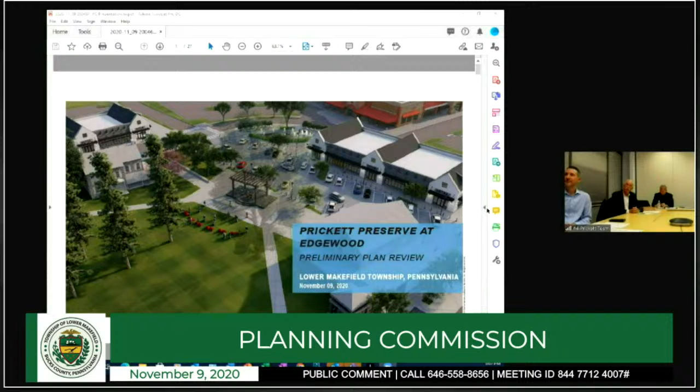So that's our group. We have a short presentation we'd like to begin with. We received, I think, 10 reviews, and we recognize the plan is going to have to be revised and brought back. We've sent you a response letter that I'm sure you haven't had the opportunity to review yet, but it will provide background to where we're going. So I think we'll start with the presentation, and then we'll go to any questions the commission might have. Fair enough. Thank you.

Sure, can everybody hear me? Yes. Okay, and can everybody see my screen? Yeah, perfect. Okay, so good evening. My name is Seth Shapiro. I'm a principal and the director of planning and urban design for Barton Partners. We are an architecture, land planning, and landscape firm located in Norristown, and we've been working on this project for well over a year now. With me today from my office is one of my partners, Matt Koenig, an architect and architectural principal.

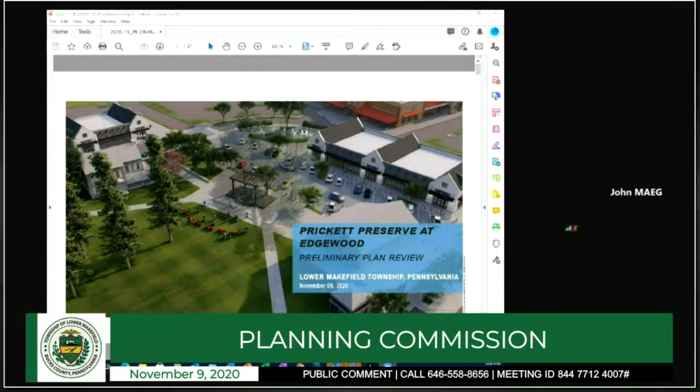Hey guys, could you take the presentation full screen, please? Is that something I need to do? Yeah. Full screen, right?

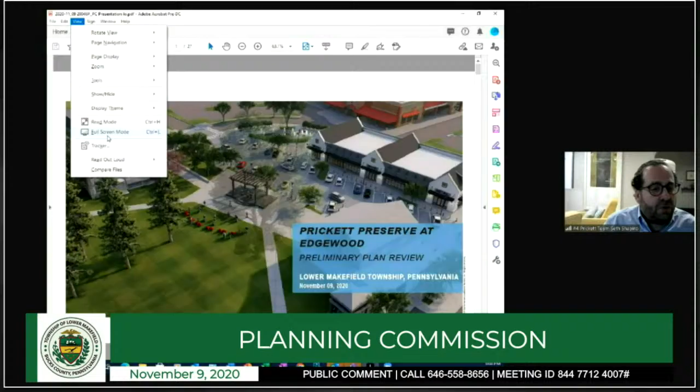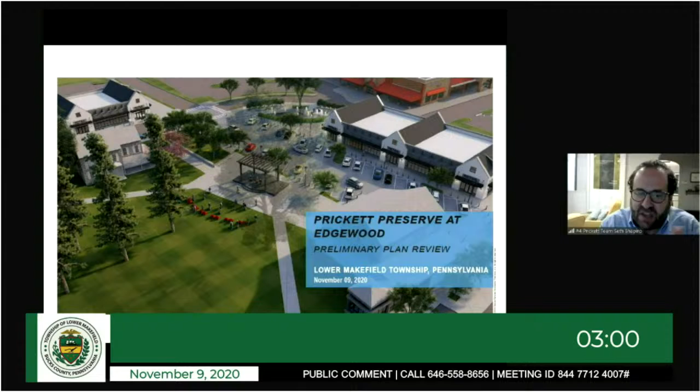With me tonight is one of my partners, Matt Koenig, one of the architecture principals, and Lauren Moran, one of our landscape architects who's been working on this project. You'll hear a bit from Lauren and Matt as we talk about an option for the landscape, which is so important for this project.

This is going to be a bit of a rehash of a prior presentation, but there will be a bunch of updates about what has changed in the plan since last fall as we've worked through the zoning process. Obviously, this is a very significant site.

It's been with the Prickett family for close to 70 years, a big antique dealer, and there are two really significant buildings on this site, which when we first looked at it, we thought, hey, this is something we need to maintain, and how can we do that?

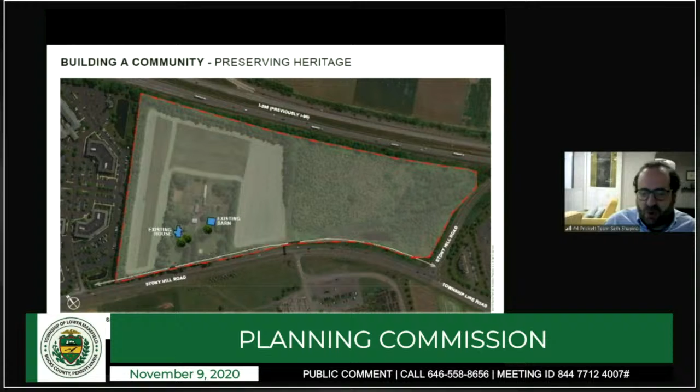As I mentioned, when we look at this site, we don't look at it as a blank site. We immediately recognize that the existing farmhouse and barn were things that needed to be maintained. Knowing the programmatic requirements we had to work with, that presented quite the challenge, but also, we think, an incredible opportunity to create a civic space.

So with that, we organized our retail uses. The big red box is the Wegmans - everybody knows about the Wegmans. Back last fall, when we were working on this, we organized other retail uses around a central open space, and this is relatively unique. Usually you'd see a big retail anchor, a strip of retail shops, and a big parking lot - a strip center, if you will. That's not what this is.

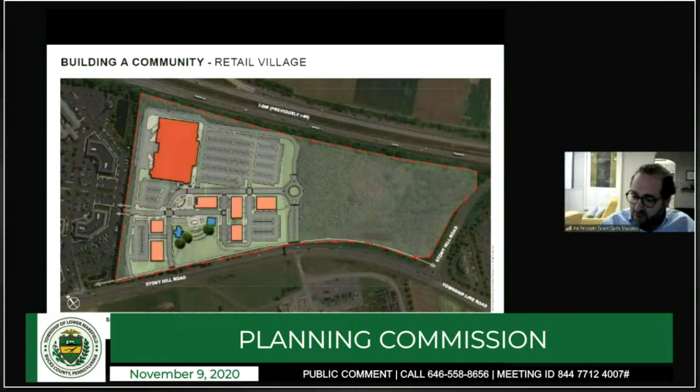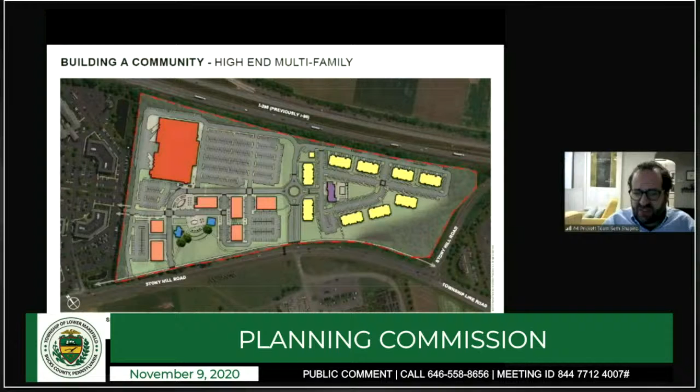There was also the desire, and this long talk of adding more of a mixed use aspect to this site. So we have, on the south side - plan north is to the left - a residential use. For us, the big thing about that is the interconnectivity. We don't just want to separate residential from everything else; we want everything connected and walkable, with appropriate outdoor activities and spaces, not only for the people using this, but for the township in general.

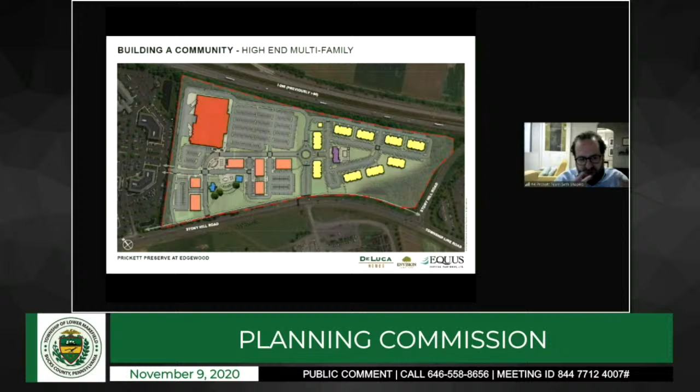So we developed this master plan. This was an illustrative plan developed about a year ago, and it's been in front of this board and in the township for a while. Again, you have your Wegmans here, various other retail uses - restaurants and other such uses - and then the residential over here.

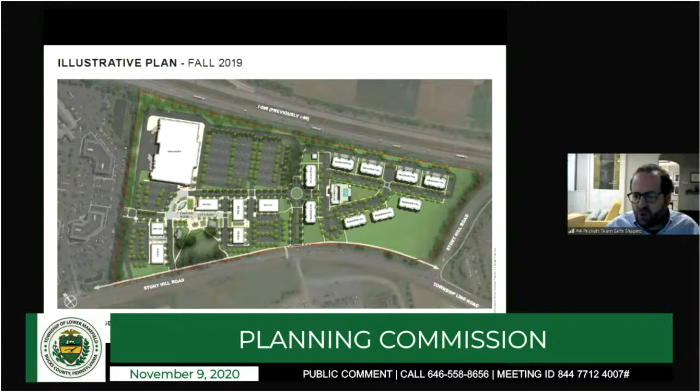That's where things stood for a while until we got past some zoning issues, and then we went into more detailed design. The interesting thing was that because we had put out this very strong concept - we went ahead even at the zoning level and created these renderings - this idea of what this civic space could be in the middle of the project.

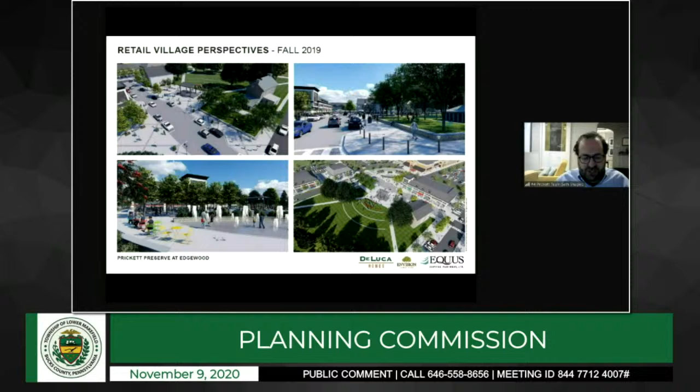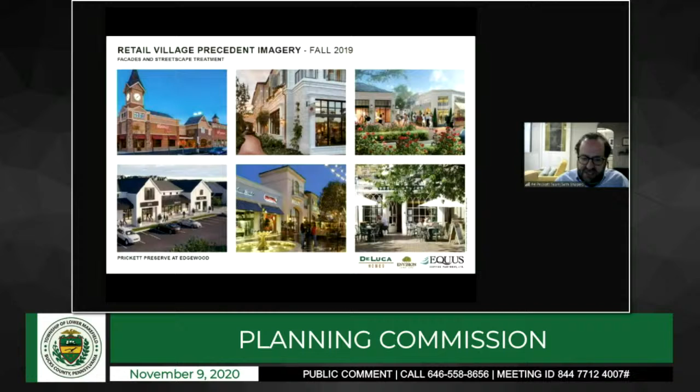We were able to maintain all of that. We used all of this precedent to guide us in how we were going to design this, right down to the retail architecture. These were things presented back during the zoning process, which brings us to where we are today.

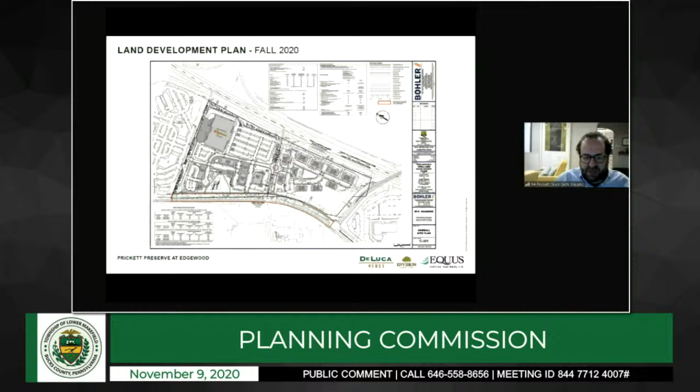We are now in the preliminary plan process, and the plan on the screen now is what has been submitted, and we have the letters in regard to this plan. This plan is remarkably similar, almost identical to the plan we went through from the zoning exercise, because of, I think, the hard work that this team has done.

You should keep in mind that this is sort of our philosophy, and this was done in a pre-COVID world. This was the idea that all of these retail uses would have lots of outdoor space, focused on an outdoor civic space, generated well before the strange circumstances we find ourselves in now. And of course, we're finding out that the places that are succeeding have these aspects to them.

This site is set up so that someone who is coming here is parking once and going to the various places. People who are living here hopefully are coming home from work, or maybe walking over to the Wegmans. That walkability is the key aspect of this. And of course, the central open space, not a parking lot, but a real gathering space.

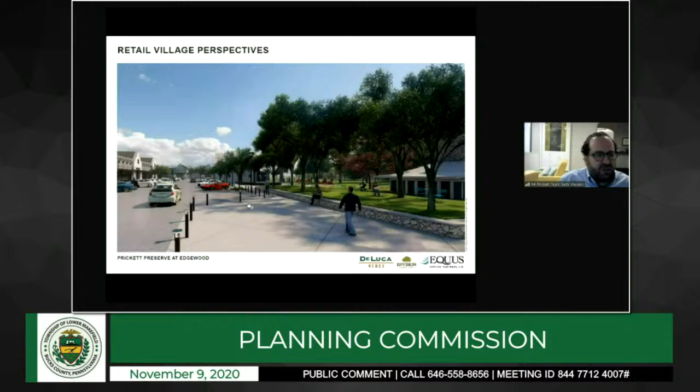In these renderings, this open space is sort of not really addressed, right? It's left as grass, it's left as tree space, but we think it can actually be so much more. We're going to present an idea of what that could be, but we're not there yet. I think we need more feedback from the township on what this space can be. And we'll get to that in a minute.

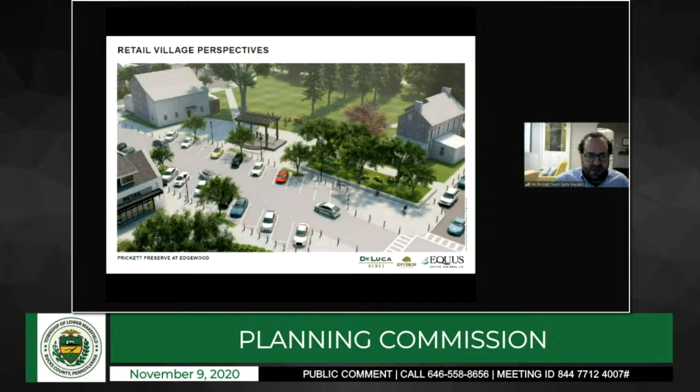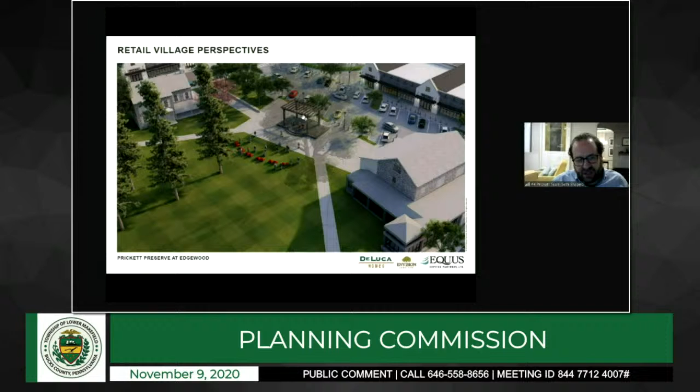So here's another view looking down into that space. Again, this is what's represented on the land development plans, the idea of possibly a little stage and a little seating area. But here's another idea.

So with that, I don't know if Travis or Lauren want to add a couple things.

Yeah, so can everybody hear me okay?

Yeah. For the record, my name is Travis North, landscape architect with Bohler. Bohler is working very closely with Barton to develop this space, and Lauren with Barton has been part of this as well. And I think we can all agree that the outdoor space and the use of this outdoor space is very important both to the township and to the owners of the site. And we envision this space being multi-purpose.

So we are working with this concept, and I want to emphasize that this is just the concept of how this outdoor space can be used with the expanded barn, with the original house, what potential tenants could be in each of these spaces. If this center block is closed down and blocked off to vehicular traffic for a couple times throughout the year, this could be used as a festival space.

And again, I think what we really want to say is these are all just ideas that we're brainstorming on. We're going to continue to work with the township to make sure that everything fits the needs of the township and the applicant as well.

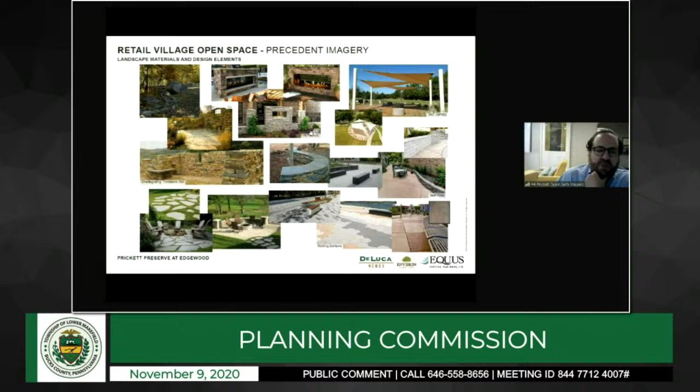So the other thing that has been developed more carefully in the last months is the actual retail architecture itself. And these are renderings of what we think those buildings might look like. As you can see, we've taken some hints in terms of the form, in terms of the farmhouse, but while the forms are traditional, the materials are modern, and some of the expression is modern, and we think that's a pretty good blend.

As I said, Matt Koenig is on the phone. He's the architecture principal in our office who's handling this. I don't know if there's anything you want to add to this, Matt?

No, I mean, I think we're just trying to keep the forms and shapes very simple. It does have an upscale farmhouse vernacular, and we're not really trying to stand out. We're trying to really create a village of buildings that all kind of work together to allow the house and the barn to really stand out in that center green space.

And that was actually an interesting comment you just made, because one of the things we've been struggling with a little bit is do we integrate some of the stone work into these buildings. I think we've been going back and forth on that, and my vote is actually leave the stone off of these buildings, let the stone on the existing buildings sort of be celebrated that way.

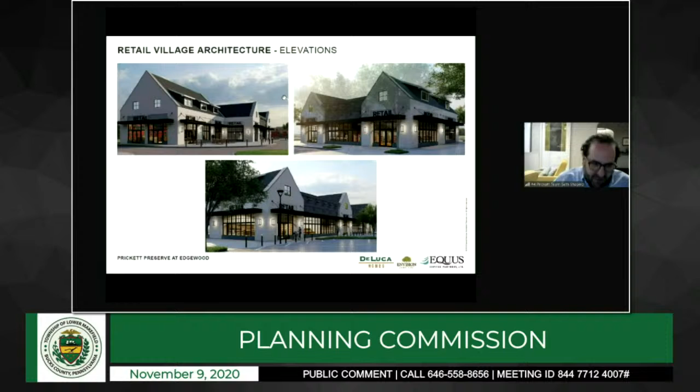And then we have the residential piece. This is actually a residential community that we did along with Bohler and the folks at Equus. It sits across from their office. This is sort of the model of what we're talking about, the building types that we're talking about. For this one, there'd be a large central clubhouse and then a series of smaller buildings, smaller unit garden-style buildings. But we don't necessarily think that this is the right look.

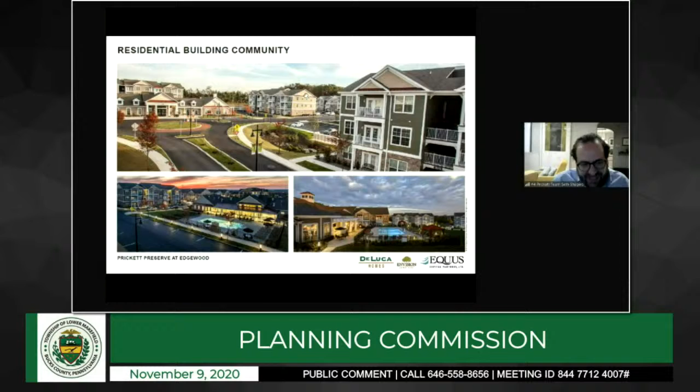So we actually have this. We've taken those buildings and reformatted them to make them, I think, appear as sort of one community in this area. And we've also enclosed the stair towers in this case, but with white siding. Here we do think, because it is a bit separated from the historic area of the community, maybe there is some stone on these buildings.

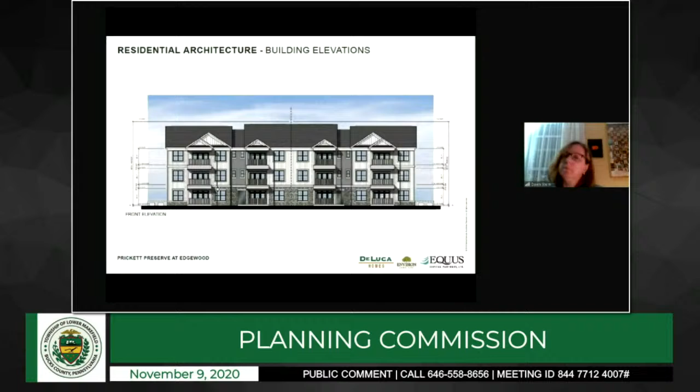So with that, that's sort of the pretty pictures. Chris, we have a couple slides here for you. You want to take us through some of these traffic improvements?

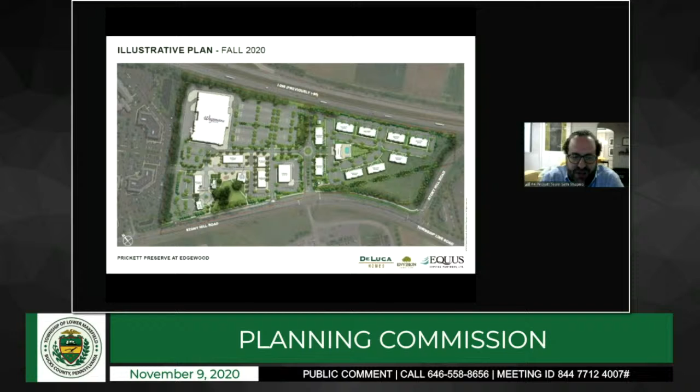That said, the drawing here is a little misleading about how large this site actually is. I don't know if one of the Bohler guys can tell us offhand how far that building sits back from the sidewalk on the main entry drive, but I'm guessing it may be close to 20 or 15 feet from that sidewalk. Correct, Seth - it's set back about 20 feet.

And the other thing we have on the entrance, unlike the piece of road to the top, is that for the lower piece we've created a landscape median, so you can have landscaping in that median. That gives an added area for buffer, and you also have a landscape buffer on the opposite side between it and the building and its parking lot.

So you essentially have three layers of buffering. You may not necessarily have what's on the eastern side, but you do have areas where you can add vegetation to buffer that building. So essentially you're planning some level of planting between that apartment building and the sidewalk, then the median, and then between the pharmacy and the sidewalk on the other side. Correct, and that's another 25 feet on that side.

Got it, all right, that was one thing. Even as I was walking the site, that struck me — that apartment building is going to be a little different than the other buildings, just from a setting standpoint. I wanted to get an idea of what your plans were. I know you can't conceal that, and I'm not suggesting you should, but what were your plans to soften that? Yeah, thank you.

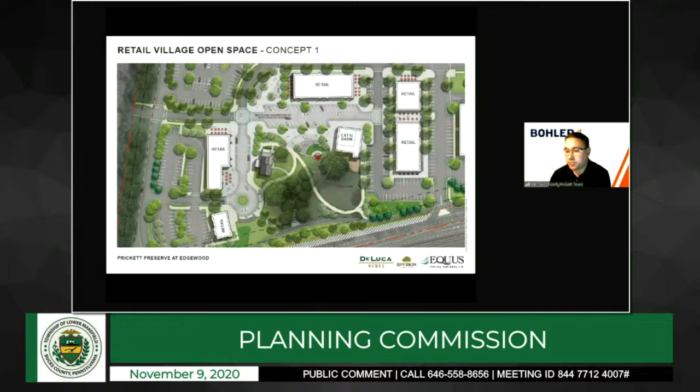It's all fairly consistent. We're doing a bit of a trade-off because in some of those areas we're introducing a lot of planting space that we're not showing on the submitted land development plan set. Obviously the intent is to stay well within the permitted impervious area. Currently the maximum impervious allowed is 65%, and the current design is around 63%. So we have a little buffer to work with, but none of the changes we're proposing in that open space are significant enough to push the impervious into non-compliance. Thank you.

I have one more question. In the engineering letter, item number 25 under the zoning comments recommended incorporating bioretention areas into the proposed parking lot design. Andy, do you care to comment on whether there's any force behind that, or if it's merely a recommendation that will be contemplated going forward?

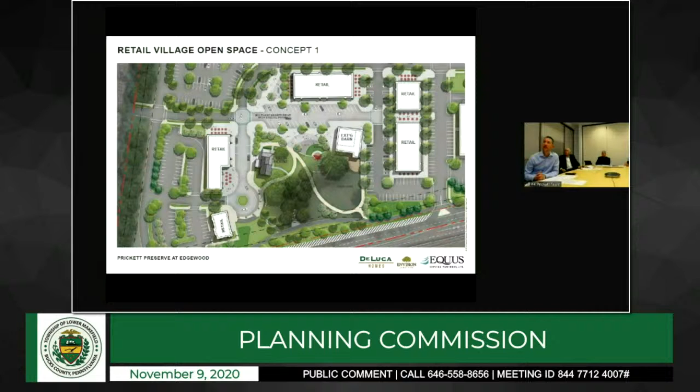That's for the applicant. I don't think it's a requirement, but it's encouraged. Yeah, and that's definitely something we'll be looking at as part of any modifications we make to this plan to address those comments. There are a number of areas, some landscaped islands, some perimeter landscaped areas around parking fields, that we can adjust so they can be used for some type of rain garden or bioretention facility. Very good, thank you.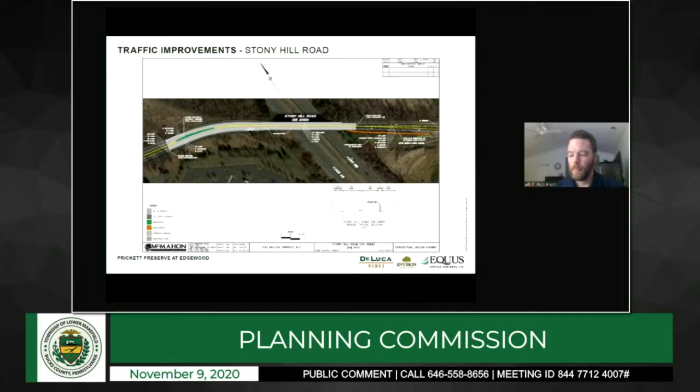Okay, so as we move forward, there are quite a few review letters. I understand that the applicant has submitted some responses which the Planning Commission may have just received this evening and have not had an opportunity to look at. I don't know if we want to go through some of those at this point.

Maybe it makes sense to at least discuss some more of the issues that Ross was bringing up, and some others in the Remington-Vernick letter of November 6th.

Yeah, so the response letter that we submitted was just recently prepared. We tried to identify within that response letter those comments that we felt were substantive enough that we would want to address, to show you that we are clarifying our design or that we intend to comply. The vast majority of the comments in all the various letters that are not included there we will comply with. There are some very specific, detail-oriented plan and report comments that we can easily address.

What I would like to do is mostly go through the Remington and Vernick letter and highlight some of the zoning issues, because I know those are typically things we want to ensure you feel safe and comfortable that what we're proposing actually complies with the ordinance. So I'll go through those briefly.

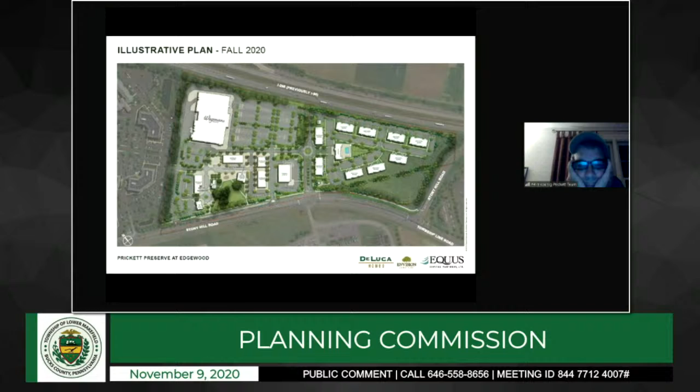The proposed clock tower at Wegmans is 80 feet above the proposed grade with a 4-foot 9-inch spire on top. Proposed grade level at the base of the tower is elevation 173, while the elevation of Township Line Road is approximately 158 at the main entrance to the site. So essentially that's an extra 15 feet. That clock tower from the main entrance looks about 95 feet in height.

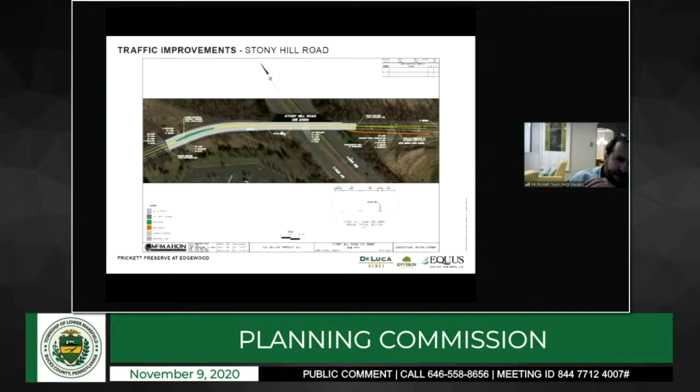Can you bring up the rendering you had that shows it? Sure. But it may be worth, since we have modeled this site, providing some sort of three-dimensional view from that standpoint, because my guess is with the building and the vegetation in the foreground, I'm not sure how tall it's going to appear. It's also set back pretty far.

And across from 295, you've got Patterson Farms there, so the view shed from that direction may be impacted by the tower.

Can you give just this, more to give perspective, because that's not that far from the radio antenna of the cell tower? All right, which is right here. How tall is that cell tower? 134 feet, so it's essentially 40 to 50 feet shorter than that cell tower. Almost exactly 50 feet shorter.

Yeah, I'm just asking to kind of give, if I drive by there and look tomorrow, a perspective of where that is. Also, there's a lower bank of tower antennas on the tower that isn't shown in their rendering here. But basically, the height of the clock tower would be somewhere between the lowest antenna and the next one up.

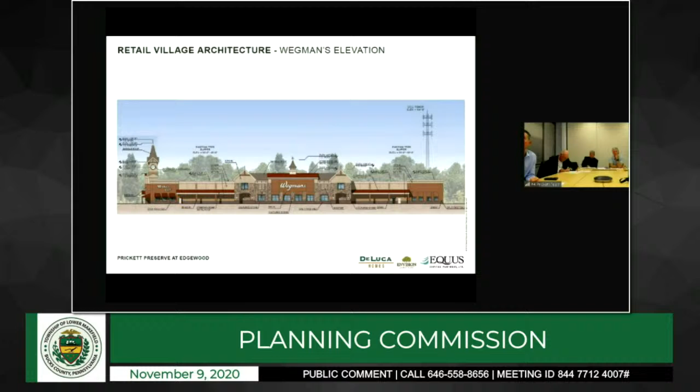Do you want to discuss public transportation and whether that's going to be incorporated into the development, or the means for public transportation? So as of right now, we are not. I'm not aware of a SEPTA bus route that goes past this frontage. I know there's school buses that go there, I've seen them many times go into Shady Brook, but I'm not aware of the public transportation component.

We can clearly ask SEPTA if they have any plans for that. But at this point, we're not making any accommodations. But that's not to say there isn't sufficient room for it to be accommodated if at some point it becomes necessary.

So, replacement trees - do you have an idea for how many replacement trees are needed? And can we get back into that waiver request, that you're removing so many trees it would require so many replacement trees, and you're providing, I think, a significantly less number of trees than what would be required for replacement.

And I can speak to that. Go ahead, Travis. The trees requiring replacement that we are removing from the site total 353 trees. That by ordinance requires 1,667 replacement trees. We are providing 687 on site. As Bill noted earlier, there are a number of places where we'll be able to add further, and we expect that deficiency number to decline. But as submitted right now, our deficiency is 980 trees.

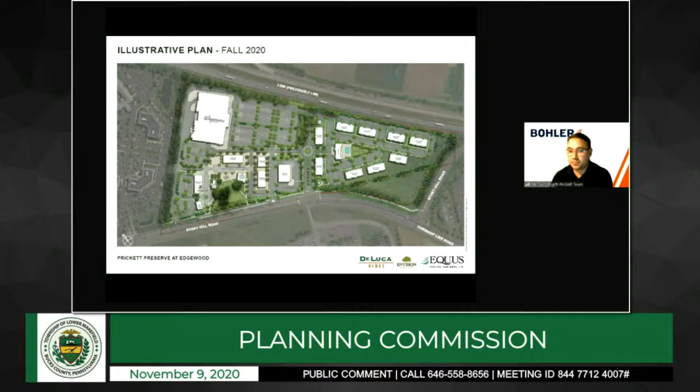This isn't for the developers, more for the planning commission, but I struggle with this one. I think I've articulated this before in front of the same audience. I feel like the waiver request asks us to say whether we agree or not, but really you have a solution to fix something our ordinances don't help with, so you're stuck and need help putting it forward logically, because that's how the engineering works. In the tree ordinance, as onerous as people think it is, the Board of Supervisors has already given a waiver option to planting all the trees, and they put it in our ordinances.

It is on our books. If you don't want to plant all the trees the way the Board of Supervisors defined they ought to be planted, then there's a fee to be paid. I don't think it's the Planning Commission's job to sit there and say our ordinances are bad, therefore I'm going to recommend we don't follow them, when there's already an out that the Board of Supervisors provided. If the Board of Supervisors don't like that ordinance anymore, they should change it.

I kind of feel strongly about this one. There was a lot of angst, hand wringing, and a contentious vote when the Board of Supervisors did this. I don't think it's the Planning Commission's job to then go essentially behind the scenes and say I don't like their solution for this one, I think they should do something different. They've already provided a solution for this question.

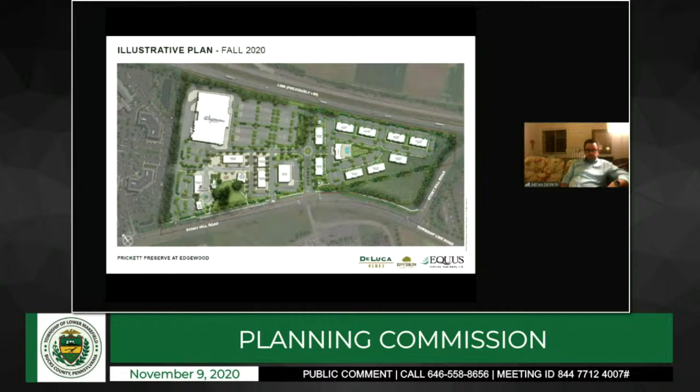I think that's all I had. Does anybody else from the Planning Commission have any further questions of the applicant at this time? It does not appear that there are any.

It seems the consensus would be that it does not make sense to go closely through the other review letters right now, because of the changing nature of what is being submitted and worked on. Unless there's something the applicant wants to specifically inquire about for Planning Commission feedback. No, we're planning to go back and address the comments received from all of the various reviews and resubmit. Then I think we'll be in a position to have those detailed comments, but going through review after review with us just saying we'll comply doesn't seem like a wise use of anyone's time. I think we'd all agree with that.

Before we let you go, though, I think we'd like to hear if there's any public comment at this time. Yep, moving them in now.

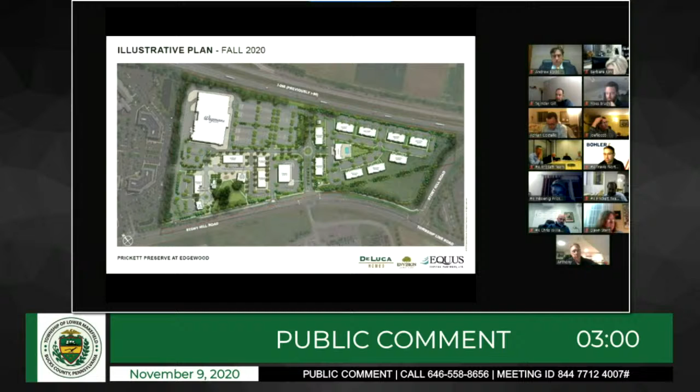The Prickett Preserve development was approved despite considerable citizen objection regarding traffic, safety, economic, and environmental concerns. This development is not consistent with the master plan of 2019, and instead makes Lower Makefield look like anywhere USA. Currently, the only two criteria met to make this land ordinance change a true use of mixed-use zoning are the distance from LMT Center at Edgewood and its size. You've misinterpreted the true use of mixed-use zoning, which is to provide interconnections with the town center rather than within the development itself.

The development will affect LMT citizens and Bucks County residents and visitors to Bucks County alike. Most concerning in the final plan is the lack of commitment to the safety of all neighboring roads and intersections that will certainly be taxed on a daily basis, handling pedestrians and cars, both from Bucks County and neighboring regions. There's no acknowledgement in this final approval plan